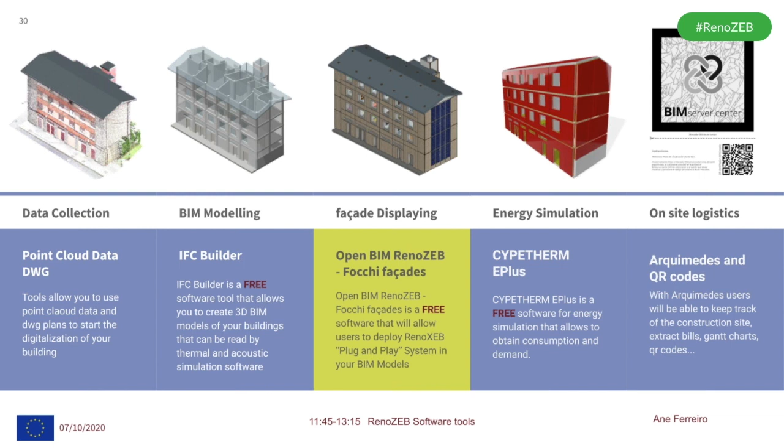Okay, so just to recap, here we have the main software that today I'm going to introduce. The first one is IFC Builder, where we will create the BIM model. Also, as you all know, you can create the BIM models with Revit, with Archicad, with other software that is available. Then we will move to OpenBIM RenoZEB Focchi facades to display the facade.

Then from there, with my building and my facade, we will move to CYPE suite. Here we can calculate pre-renovation and post-renovation simulations and compare them with CYPE improvements. And finally, I will show you all this information in Arquimedes. The budgets, the Gantt charts, this is what we can do in Arquimedes, okay?

Okay, so first of all, IFC Builder is the tool to create BIM models. As you know, what is the big revolution about BIM right now? It's that before we used to have a 3D model created by Rhino, AutoCAD 3D, SketchUp, among others. This 3D model didn't have the data included in it. The big revolution, as I see it in BIM, is to have these 3D models along with the data together.

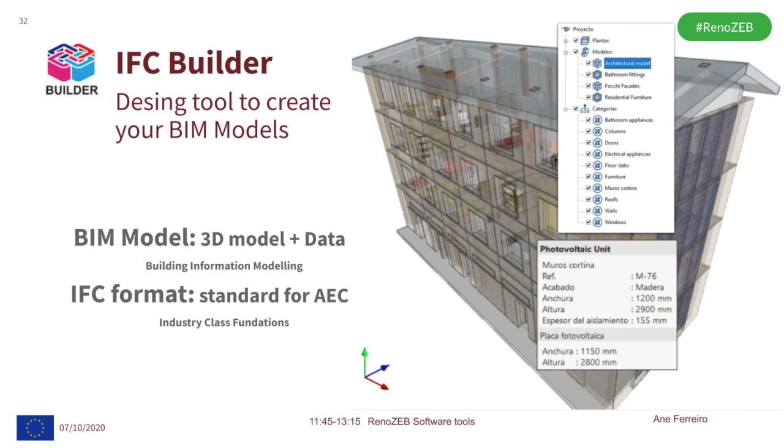Okay. So in IFC Builder, we will build the BIM model. In IFC Builder, we will also be able to include collected information, for example point clouds, DXF, other formats, images, PNGs, etc. The idea is that this software first allows you to bring in this information and then to create this model of walls, windows, slabs. That is BIM modeling right now.

Next slide. Okay. As you see here, through this point cloud data that you have seen before, we have created this BIM model. That will later be useful for CYPETHERM and for energy simulations, which is our objective in this project, to create these energy simulations and to demonstrate that renovation of the buildings could be beneficial.

So as I said before, in this modeler, you will be creating walls, slabs, doors, windows. It's a really simple program that works in 2D, and I will show you later on. First, IFC Builder, then OpenBIM RenoZEB Focchi Facades, which allows you to add a RenoZEB Focchi solution. It allows you to include the predefined units that exist for the renovation facade: opaque unit, window, solar collector, photovoltaic, corner unit.

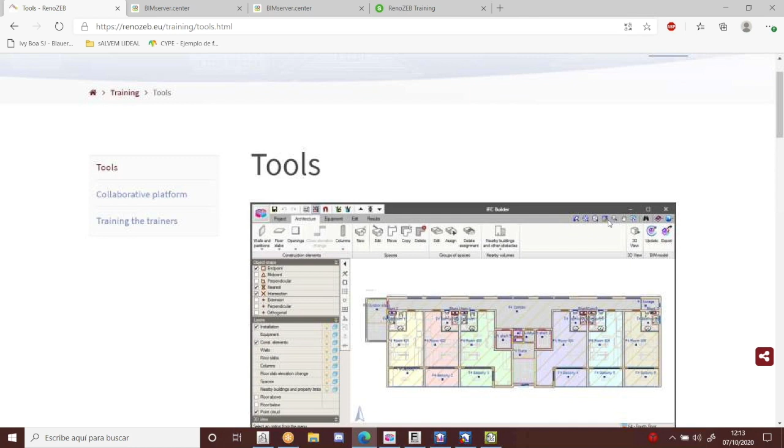Well, first of all, I want to tell you that here we are on the RenoZEB webpage. If you go to training, tools, here you can download all the tools available in this project, like IFC Builder. Also you can access training material on YouTube, on Udemy, for CYPETHERM EPlus, improvements, and so on.

If you click any of those, it will take you to the webpage of our server, called BIM Server Center, and here we have a lot of different software. As you see, this is available for free, so you can download it and try it.

Just to let you know, here in the store of BIM Server Center we have more than 137 programs from different manufacturers and features—structural analysis, bills of quantities, electrical systems, a lot of them, and I think almost 33 are free. So I encourage you to go here and see other programs, because this thermal phase is just one of the phases we can go through.

Here, if you go to thermal analysis, you have all the CYPETHERM solutions: CYPETHERM EPlus, that's this one, the international solution of CYPE. But we also have specific solutions for Spain, France, Italy, Portugal—CYPETHERM adapted to these countries, so you can obtain the energy certificate of each of these countries. That is also interesting.

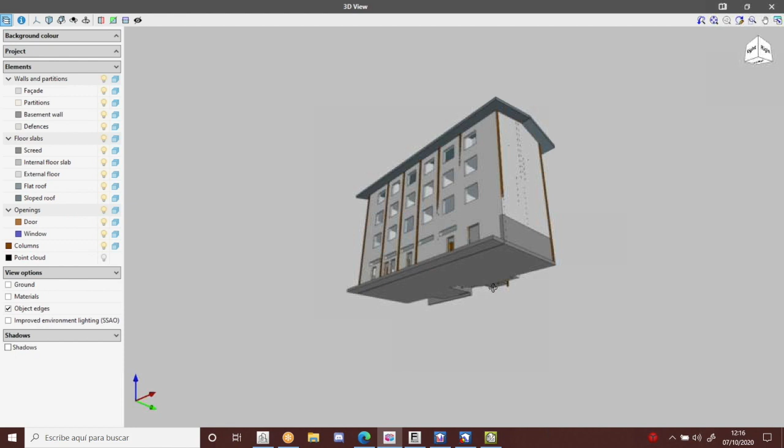This software still works in 2D and then generates a 3D view, a 3D model. It generates a 3D model, but it's working in 2D. I'm going to shut down the point cloud here.

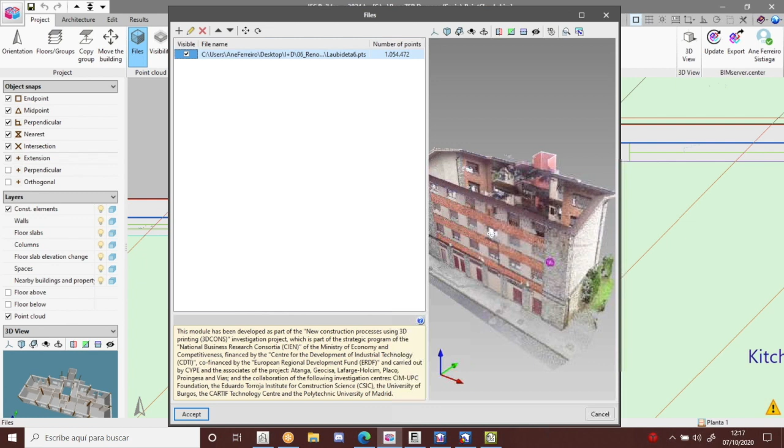So how did I start this project? We started this Durango project using two things. Here you can see we start by creating a point cloud, which was done by demo partners. In this software, we are able to include this point cloud in the model, but we are not able to translate it directly for modeling. We use it as a template in the floor plans to be sure that what we are drawing for the renovation fits somehow the reality.

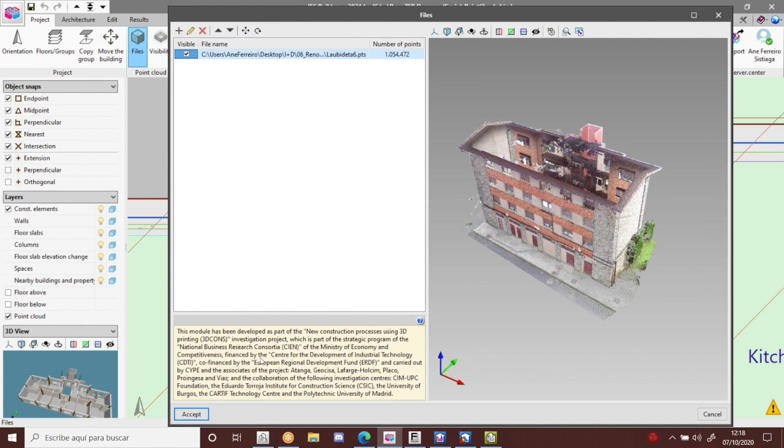This was the first implementation we did in the project, to be able to include huge point clouds. These point clouds are really, really big, so we do a simplification here in the program to be able to run them. Here you can see the point cloud, and here is the representation in 2D of the point cloud.

Then the other thing we used was a 2D plan that was given to us by the owners of the building, Durango. They provided us with a point cloud and with this 2D plan. From those two elements, we tried to create the most fitted project.

All right, I'm going to show the construction elements and I'm going to show again the results.

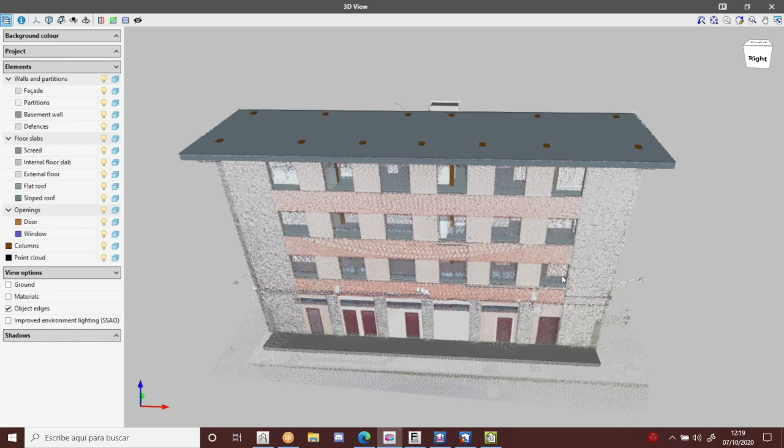What we will be able to do here with the point cloud, just to be realistic about what point clouds can do right now, is use it as a template. You will not have a translator that gives you the 3D model from the point cloud. This technology is actually under construction right now, not only by CYPE but by a lot of other software companies, and it's not perfected yet. So it's still difficult to scan the building and instantly have the BIM model. That should be one of the most interesting aspects of this technology.

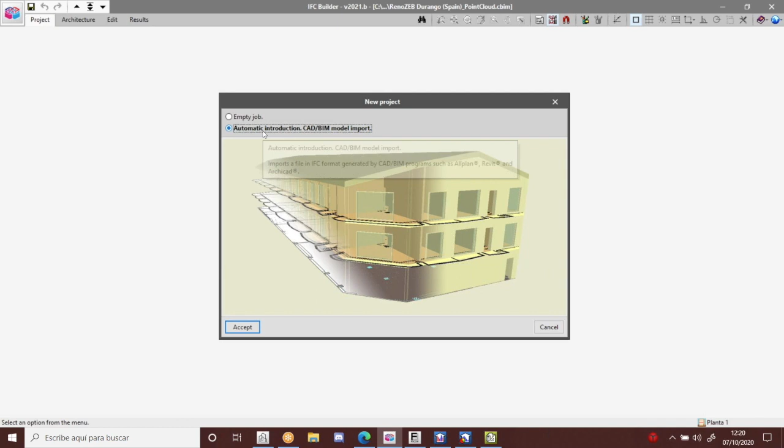I'm going to show you a little how to model. Really quick, I'll put in two or three things because we have quite a lot of software to see. So I'm going to create a new project, as an example, an empty job. I could put in another BIM model or a CAD model or a CAD DXF file, but I'm going to do an empty job now. I can add the floors, so it has two floors and the roof. Accept.

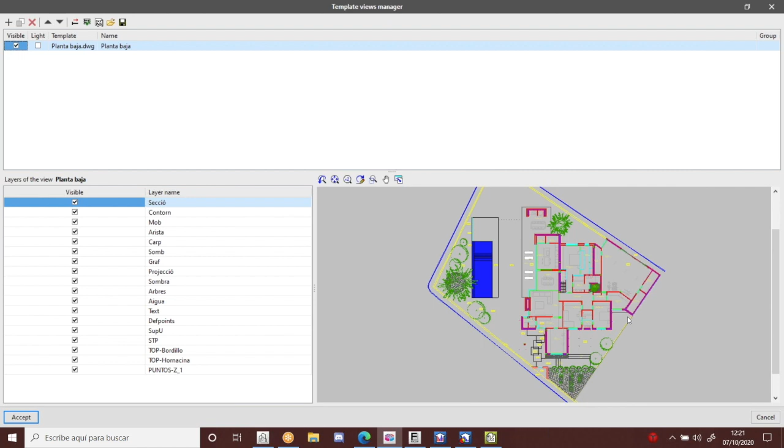Do you want to introduce a drawing? Not now, but here you can also add, for example, let's add one just to show you. This is a CAD template that I have from one example we usually use in the project. Actually, I'm going to add the Durango example that I have here. Durango... no, it's not here. It's, sorry.

So from this sense, we can start with a CAD project in renovation. Sometimes you have these CAD projects, sometimes you don't have any plan, or you have a plan in PDF. You can also add a PDF here if that's the case. So the idea is starting with this, and from here adding the point clouds.

You can start modeling the building. I'm not gonna open the point cloud now because it lasts like 2 or 3 minutes to open. But as I showed you before, you can put those two things together.

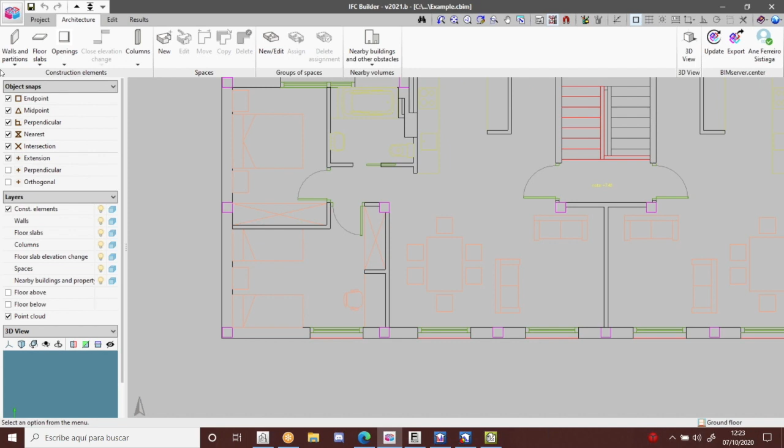I'm gonna create an external wall, for example, external one, okay? From 30, it's not a party wall. And it's really simple to start modeling. You have to be sure that you have snapped the DXF objects, okay?

And now I can in a really simple way start modeling my project from these DWG files. Sorry, I'm gonna do just a quick introduction for you to see the envelope of this floor. So here we can see now that we have modeled the first envelope, and well, we can do so with the rest of the elements.

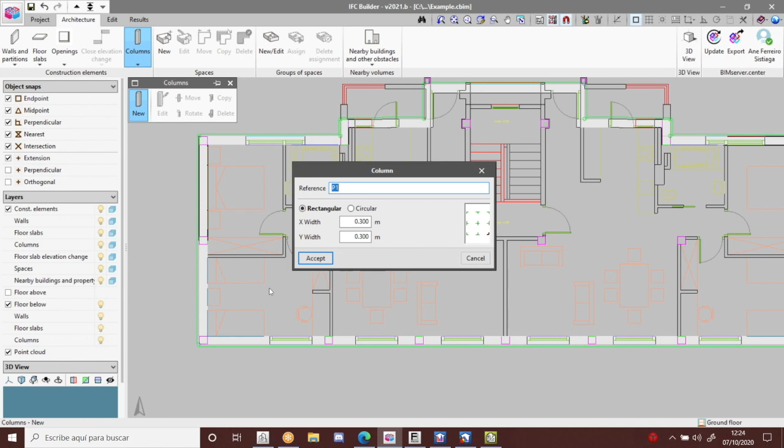We can do columns, for example. I don't know, these ones are little, but okay, we can put the columns. I think this modeler, even though it is quite simple, if you have a really high-tech building, you are not gonna be able to model with it. I think for these buildings that are really regular, typical residential buildings, like from the 80s or the 90s, it's easy to use this modeler, and it simplifies a lot of the work.

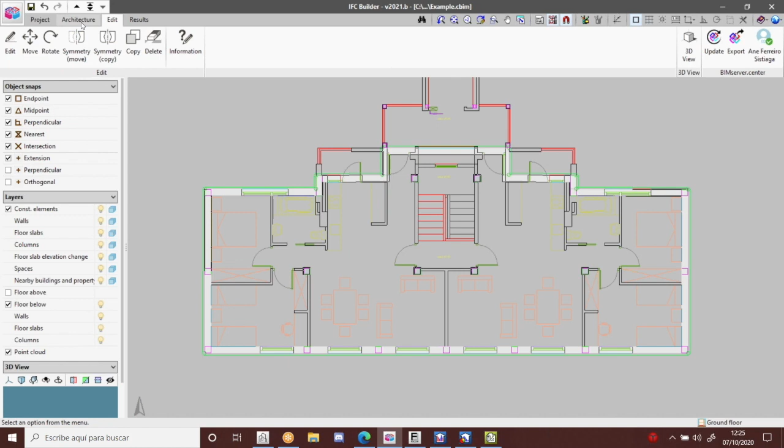Let's see. Okay, we will have now this floor. We can, for example, go to the next floor, sorry. And see, you have the template from the floor below. To continue modeling, you can copy around different buildings, etc.

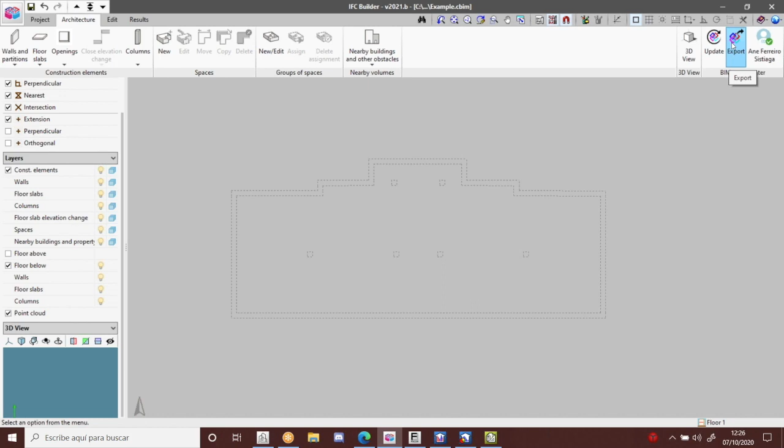I just wanted to tell you also here, when you download an IFC builder, you will have here this advertisement. We have also another 3D modeler that we released a couple months ago. This 3D modeler completely works in 3D, okay? It's more similar to Revit or ArchiCAD or Allplan or other modelers. It's also more complicated, but it's also available for free. So if you want to try it, it will be really interesting for us.

So now we have the floors. We can here visualize the different floors, etc. As you see here, we have drawn all the model. I'm gonna show you also, for example, how to put a window, just for curiosity.

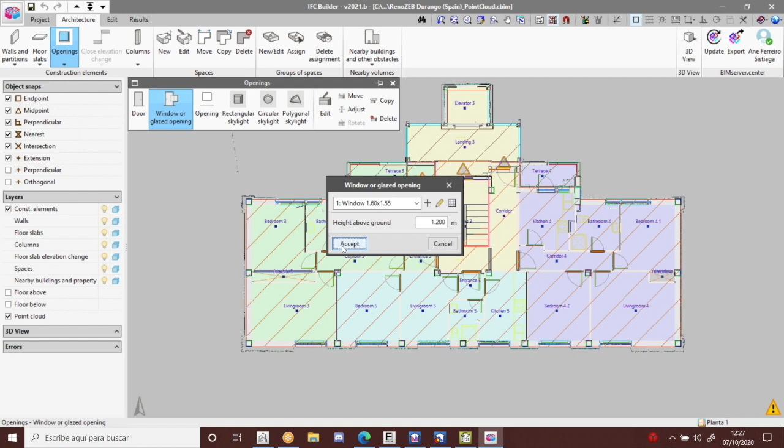Here I have created all the types of window in the building, okay? And actually it's really easy, you click and you click and you will have this window. Here it's warning me that I have introduced the element and it's going outside the wall, okay? It's here, no, and it's going outside the wall. You can see the slab there.

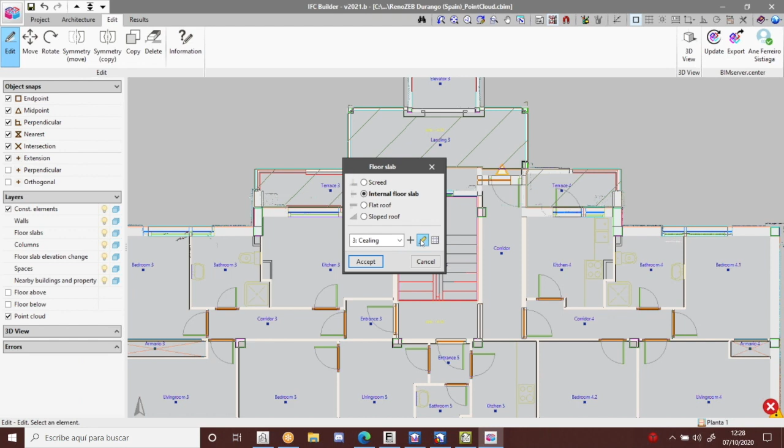So also one thing that this program does is to warn you if the model is not correct for thermal calculations. For example, this floor slab has been introduced as an external floor slab. I should correct this and introduce it as an internal, okay? No, it's as an external. This ceiling, if you see here, okay? So when calculating, the modeler is gonna tell me if the project is okay for energy simulation or not, okay?

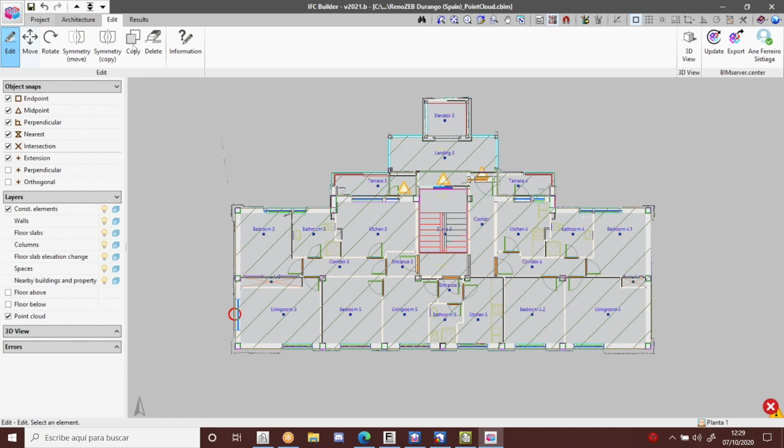I'm gonna delete this window. Oh, now it's giving me this warning, because I have changed this type of floor slabs. Look, I have changed this floor slab to external. So now it's warning me that all these floor slabs are external, but actually are internal. Okay, and see, and now it's correct.

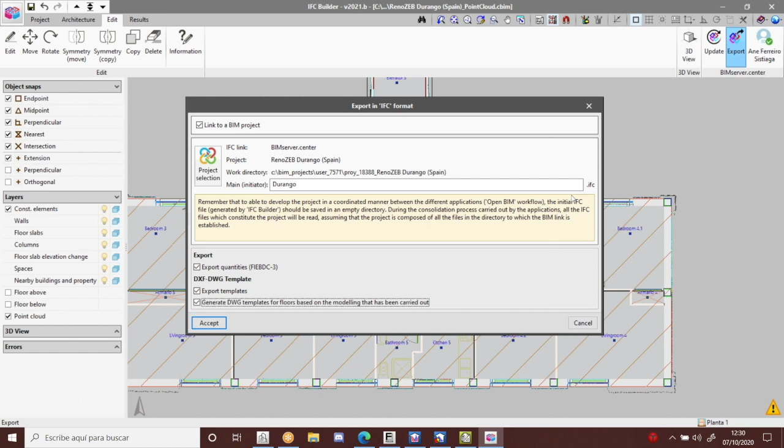Okay, so when finished modeling your building, you will have to export to our server, no? You will have to export to BIMserver.center. As I say, you can export quantities in BC3, and you can export your own templates or generate templates from the ones created here in the project, okay? Accept. I'm not gonna generate templates because I don't need to.

And now the project is stored in BIMserver.center, but it is also stored in this folder, C:\bim_projects. Here you will have all these IFC, glTF, BC3 files, etc. inside this folder. Okay, so now I have the non-renovated building, let's say, and I want to apply the Focchi facade.

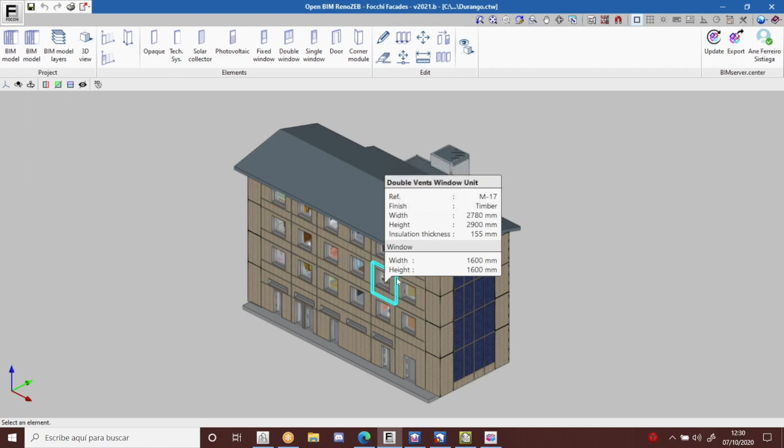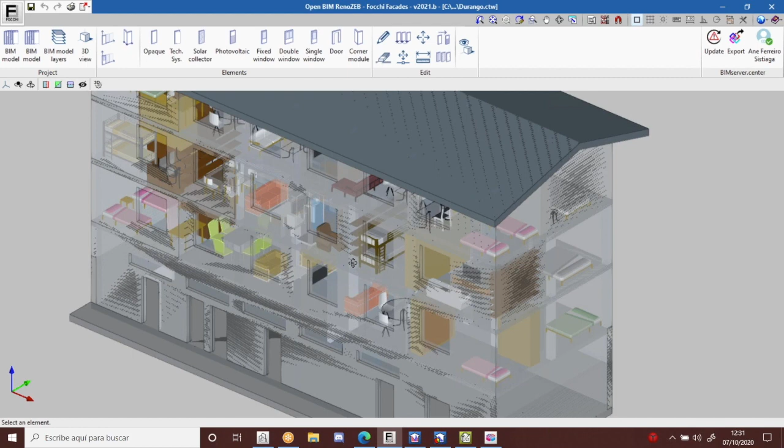What I have done here is I have imported, I'm gonna shut down the Focchi panels, the model of my building. I'm gonna put some transparency on the walls. Not only have I done the 3D modeling, but I have also added furniture with another application that we have in BIMserver, and the bathroom fittings with another application that connects with plumbing calculation software, etc. That's for you to see.

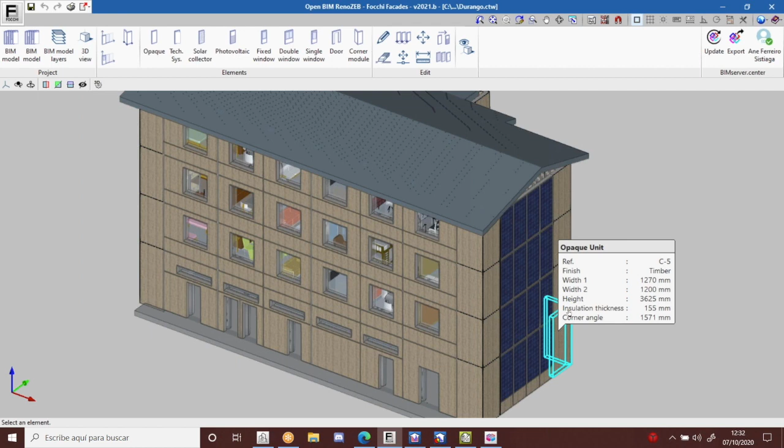So after doing my BIM model of what is actually on the renovation site, what I want to add is the Focchi panels. This first edition is somehow a preview of what you are going to obtain, because in the end the final result is generated by Focchi, the manufacturer. They help you do the project, fit the panels, and see the best way to transport and install these panels. This is a preview to do thermal calculations, let's say.

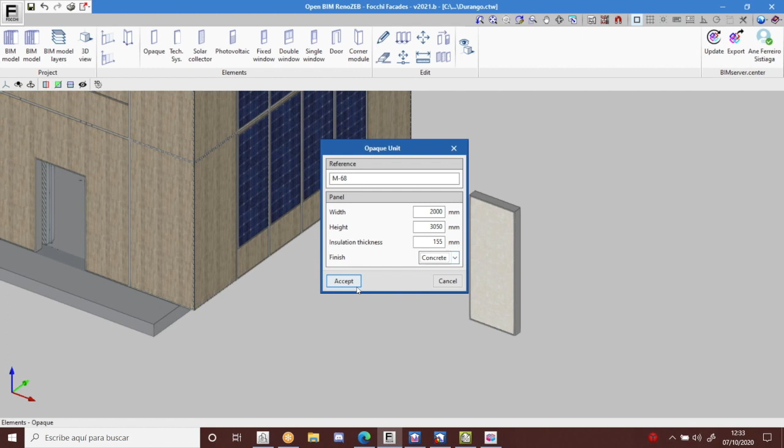So this is a really simple application. You have all the units that Focchi has available for this plug and play facade. For the opaque unit, you can set different widths, heights, insulation thicknesses, and type of finish material. First we have solid panels. Then we have panels that are physically the same but have technical systems inside, to indicate to Focchi that these panels will contain technical systems.

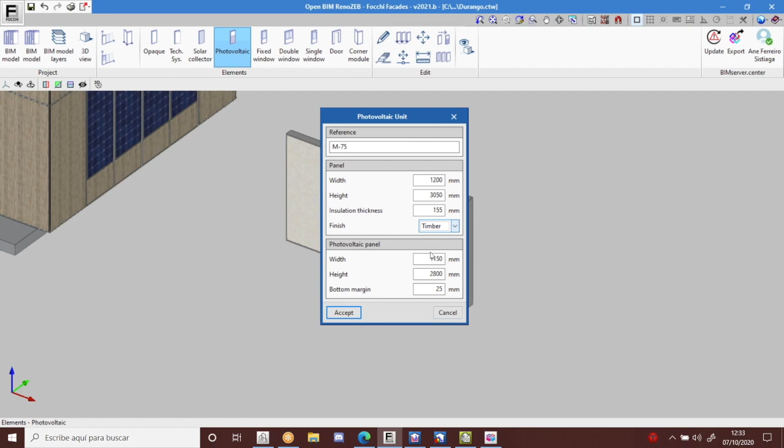We also have panels for solar collectors, and photovoltaic panels. Later on, I'm sure Alessandro will explain really well all the types of panels and possibilities available for this plug and play facade. But just to show you a little of what is available and what you will be able to install in this renovation.

Then we have windows, fixed, double, doors, and then corner modules, because, as you know, for renovation the corners are really important and we need to fit this information. Okay, so I'm gonna delete this, and show you how to use the software a little to do this pre-design phase, a really quick phase.

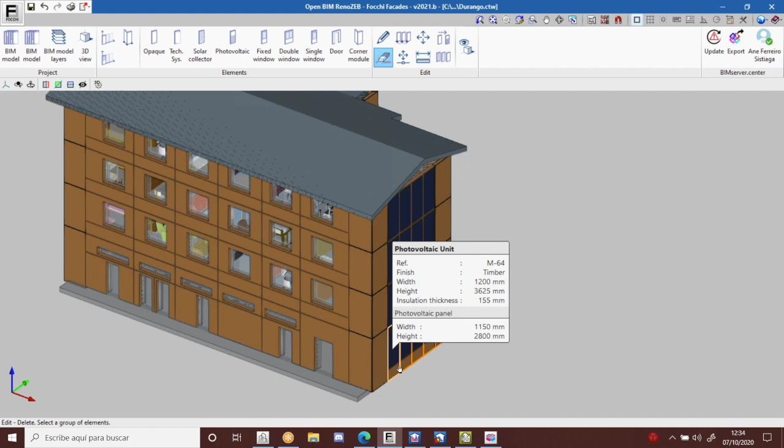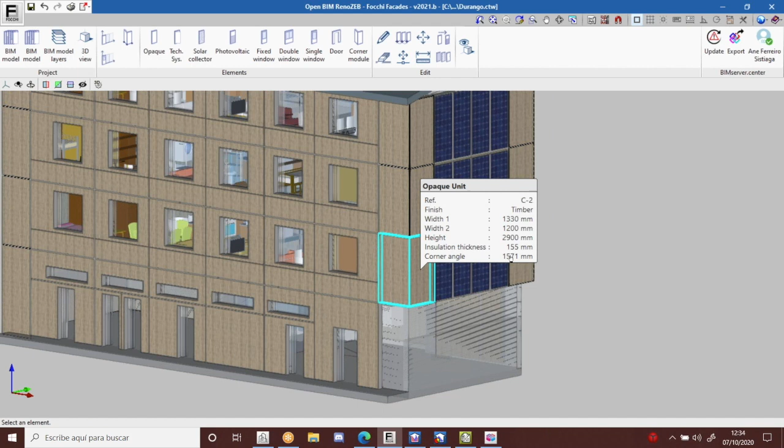I'm gonna delete some of these panels. If you use Alt 2, 3, 4, you can go to the different views, and you can rotate. For example, I think this facade could be optimal for photovoltaic panels, and I'm gonna install them here. You can install them individually, as you saw before, but we don't want to do that. We need the software to help us, so we are going to use these three buttons to install the panels in the module.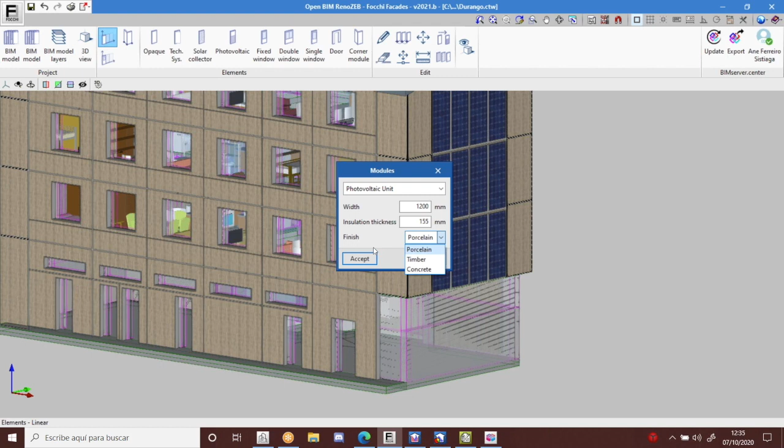We choose which type of unit we want. I'm using a photovoltaic unit, the width, the insulation thickness, the finishing, porcelain. And then I just select the height of the panels. This will build them. Look, this one has not been built because it was smaller than the photovoltaic panel, so it doesn't fit. But it's okay. So this is the way we can install.

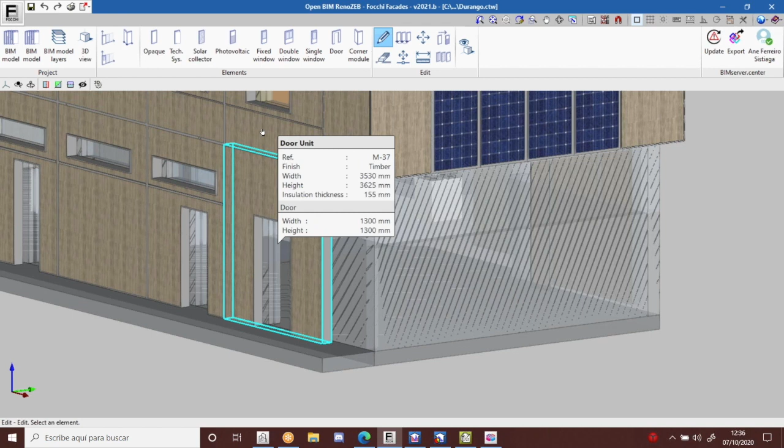I'm gonna do it again for you to see. I go here and install a photovoltaic panel, click here and here, and then the height of the panel. There, accept. I clicked a little bit under, but it's okay. So this is the way I can install this panel.

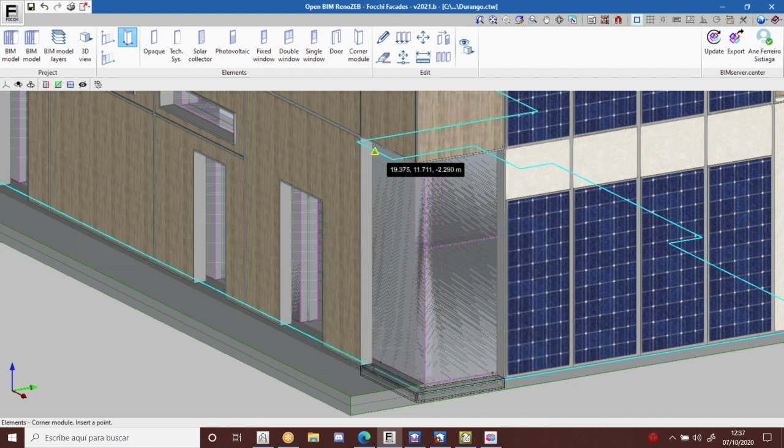For example, here I actually want to use a corner panel. Same process, an opaque unit, I click here, here, here, and the height, accept, and you have installed this corner panel. The same if the corner faces backwards. I'm gonna delete that one.

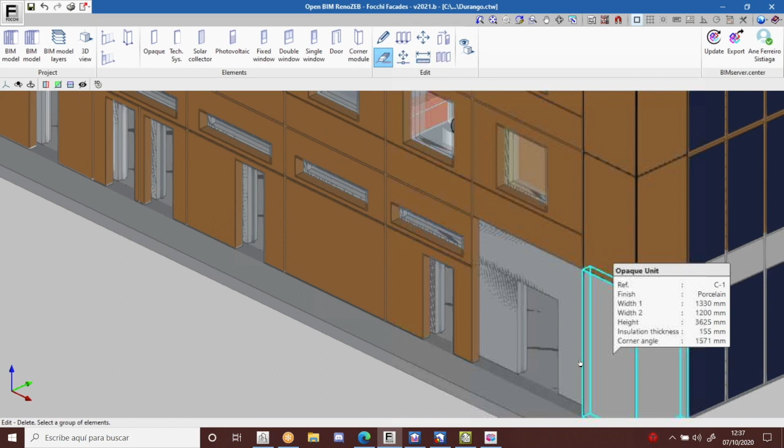Also for windows and doors, you click this one. For example, I want a door unit, accept. First I tell the software where the door is, and then where I want to put the panel, and it actually brings you the panel here.

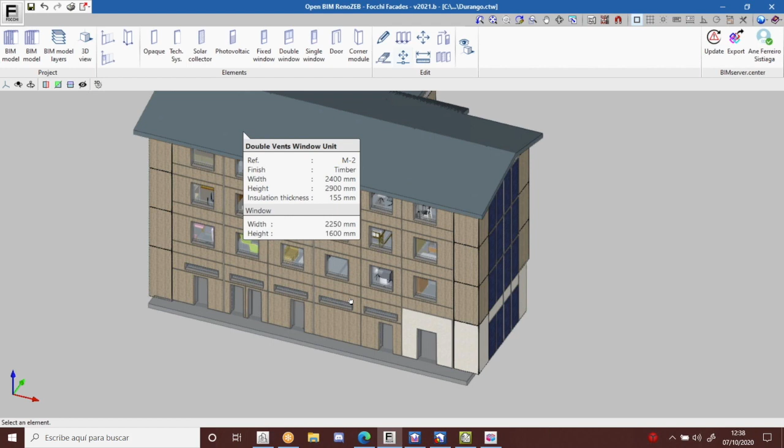Okay, this is a really simple software, and the idea is to use it quickly to see how a renovation with this system can fit in your building, and after that to calculate in CYPETHERM, with the information exported, the simulation of this building. I will show you later on these panels in CYPETHERM, and you will see CYPETHERM is quite an advanced program.

It has EnergyPlus. It's not as simple as this program, okay? But this one I think is really interesting because it gives you this first glance. Also, you could have here the PDF that is going to be exported with all the description of the panels, the different sizes and types, etc. Okay.

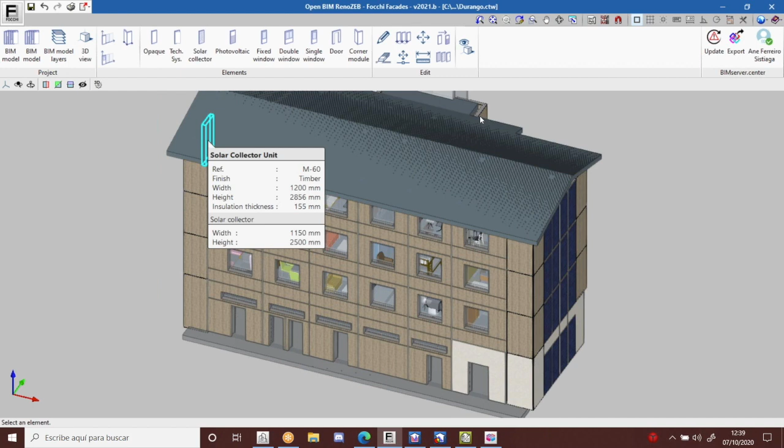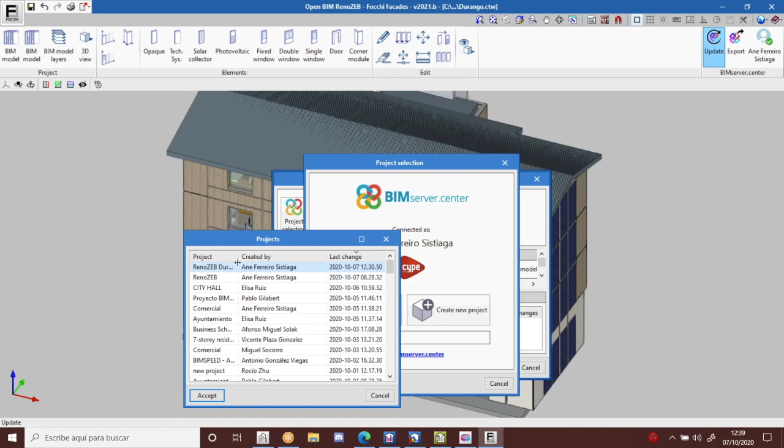Let's go now. When I'm finished, the idea is, okay, now I have finished the plug and play distribution, let's say, and I'm going to export again. This is the example, so I'm not connected here to BIMserver. I will have to connect in this button, project selection, and select my project here. So I could here select RenoZEB Durango. I'm not gonna do it because I have changed things here and I want to use the original file, okay?

But then you will export the project again and it will be able to arrive to CYPETHERM, okay? So the idea is that first we are in IFC Builder. Sorry that I am being so insistent, but I think it's important that you know the workflow. First, I have built my model in IFC Builder. Then I have created this Focchi facade system with Open BIM RenoZEB Focchi facades.

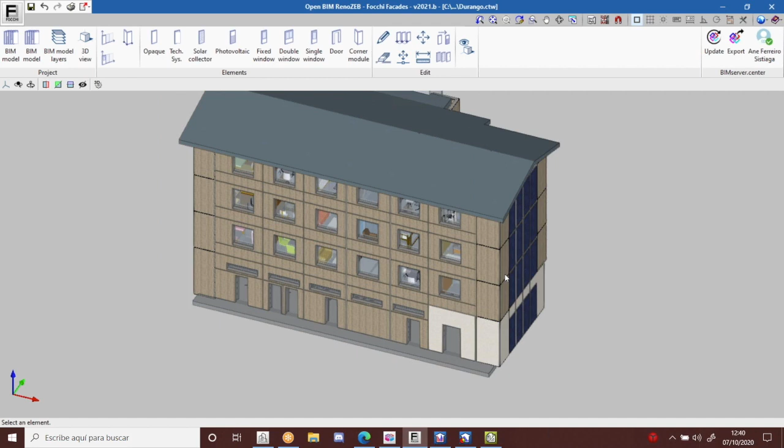These two softwares are completely free. So I think it's one good start option for those who have not yet entered BIM modeling. So you can enter for free, try it and see what's going on, and it gives you some important advances in your work. And then we will export again, and we will load this same model in the CYPETHERM software, okay.

This CYPETHERM software is quite a more complex software. As you know, thermal calculations are not as simple as displaying one facade. So for that, I'm going to remind you that we already have some courses on CYPETHERM on YouTube. If you want to learn how to use the software, these courses work quite well. They are 1.5 hour courses,

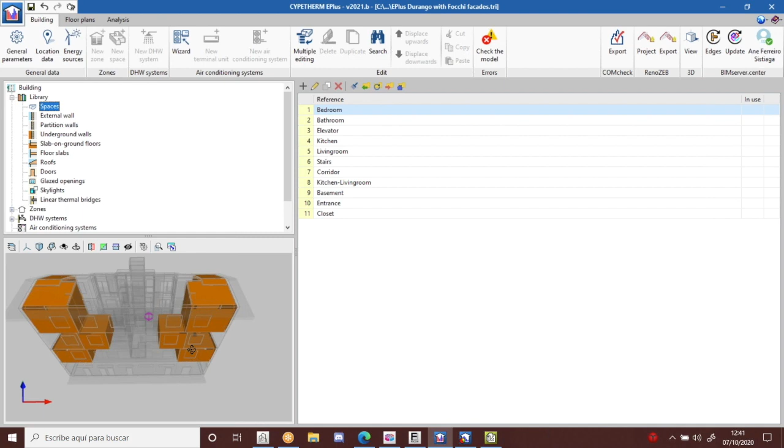and I'm not gonna be able here to explain detail by detail all the features of this program, but basically you have your BIM model, you have all the information that has traveled through the IFC format here, the external walls, the partition walls, the underground walls, the roofs, the doors, okay? As you see here also in the 3D model, you can see the openings displayed. You can go through the different openings of the building, okay?

Also, the thermal zones of the building. Here you can see we have the different apartments. Also, all this is information that has been read from IFC Builder. Here I have not told one important thing. Sorry that I go backwards and forwards, but one important thing, not only in IFC Builder, but for any person that wants to do a simulation, are the spaces or rooms, okay?

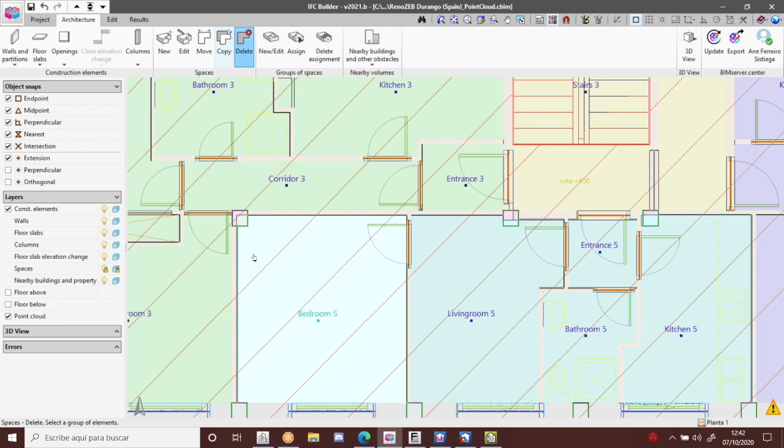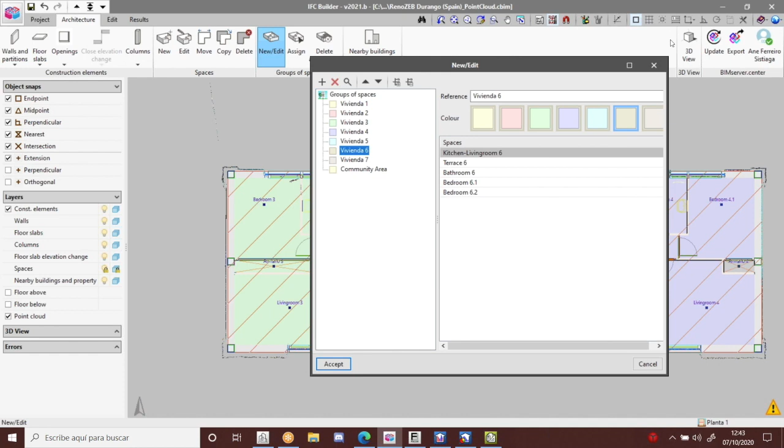This information that you are seeing in CYPE actually has been created here. So you have here the different spaces or viviendas, the different homes, sorry, with each of the spaces that is dedicated to one of the homes. Here is where you can manage and say, okay, this is a bathroom, or this is a, I'm gonna delete this space, but basically, if you want to add, I have here created the different types of spaces, and you click in the space, that one, and it automatically detects the space, and it's gonna give you that measurement, okay?

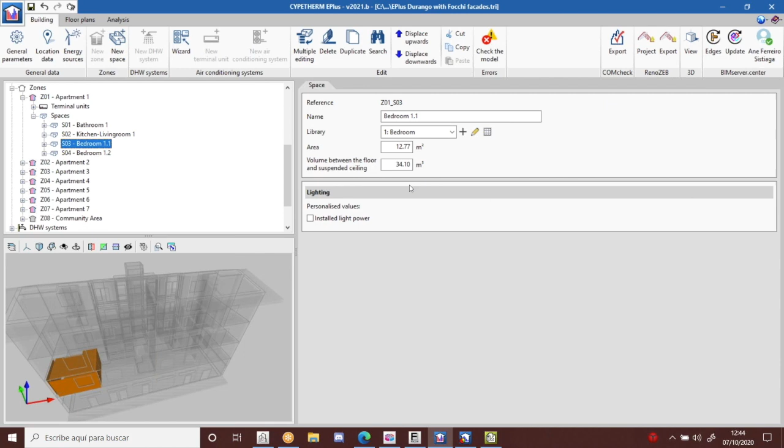So all this information that you have created here is then represented here, okay? For example, it's able not only to read the spaces, but to read the apartments. You have here inside apartment 1 the parts, you can set the area, the volume, etc. Okay, creating these thermal zones, hot water systems also. You can also add air conditioning systems here.

Okay, it's a quite extended program that goes through all the different parts of energy efficiency, from the description of the elements to hot water, air conditioning, and shadows. And from all that information, it deploys a simulation for this building. So here I have the solution with Focchi facades. I'm gonna save. Wait, and I'm gonna show you a little bit what I have here.

When I open the program, I don't have this image on the right, okay? Just in the case that I'm importing from Focchi facade, I will have this first panel that is composed of the panel of Focchi and the panel of insulation, but then you will have to add here the actual facade of your building, because we are not able to know what is actually installed in your building. So for example, with the Focchi facade panels, what you will have will be only these 2 layers first, and then you will have to add all the current layers to the project.

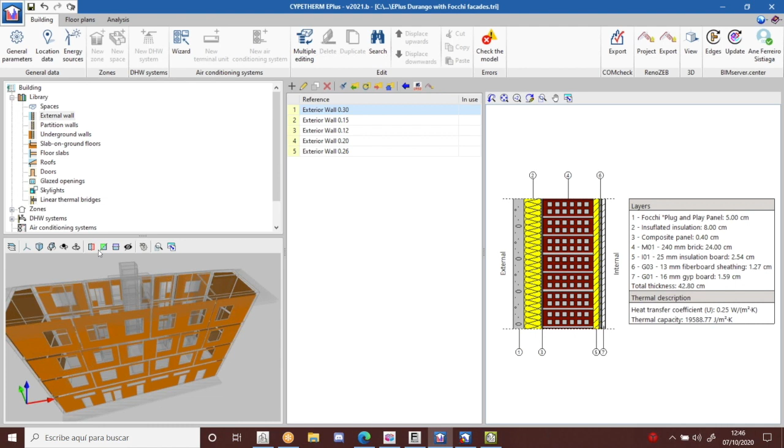Okay. For those exterior walls, I have applied the Focchi facade system all around the building. Actually, in the real demo, we are not applying it to the complete facade. I think we are applying it to the front and both sides, not the back. And what you have here is a layer description of these walls: Focchi plug and play panel, the thickness, the conductivity, the thermal resistance, insulation, composite panel. This is the layer description that you can see here, okay? But here you have all the information that can be changed, updated, etc.

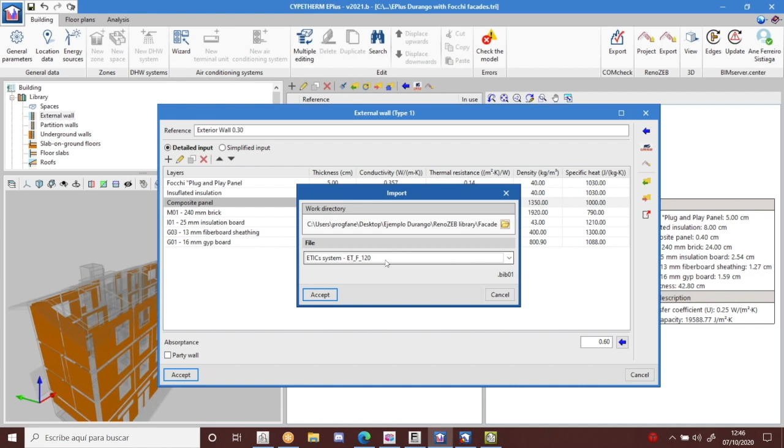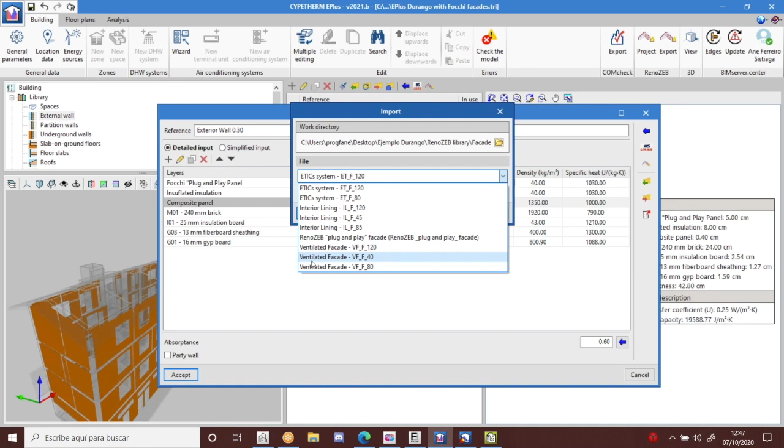What is interesting from this part is that you will have accessible, for example, part of the systems that we provide with the e-catalog. You will have accessible some systems to use for your renovation: ETICs system, interior lining, RenoZEB plug and play facade, ventilated facade. Okay. Here you can load it with the library.

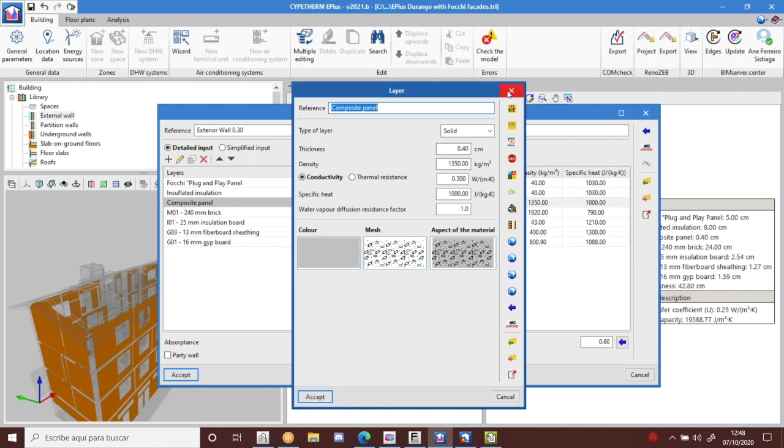And also, just to inform you, we have quite a few other libraries. If you click here, you will be able to display a lot of libraries. Some of them are from Spain, some of them are international. For example, these are cavity. Some of them are from France. Representative materials, for example, finishings. And here you have quite a big library, not only the one that RenoZEB provides, but others that projects we have participated in have provided to the program. So here you have something to start your project.

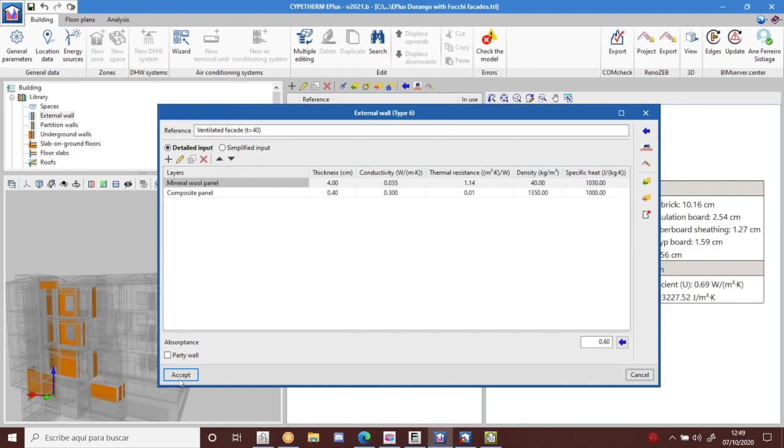As you see here, you have all the information. You can change the thickness of the composite panel, to see which will perform better, okay, and accept. So in this way, you will be filling in all this information in this exterior wall, for example, with this, which was the original wall. I can add some insulation. For example, I'm going to go here to the ventilated facade, and I could add this system, okay?

Sorry, not here. You have to go inside the project and add this here, okay? Not outside. Here you create a new type of wall. You have to go inside an existing wall. Okay, so the same for partition walls, the same for roofs.

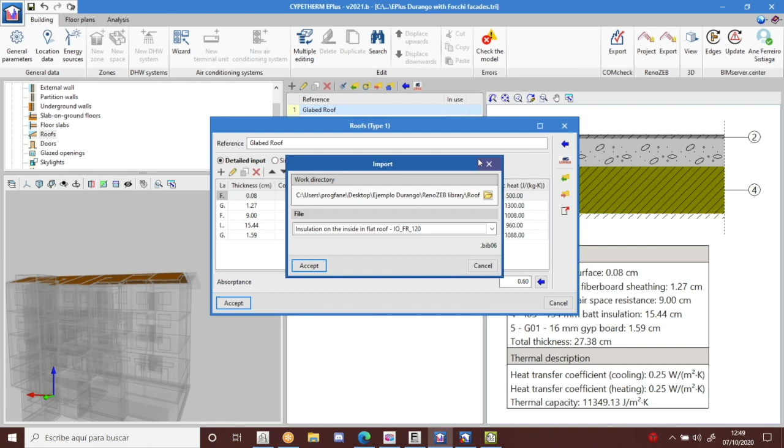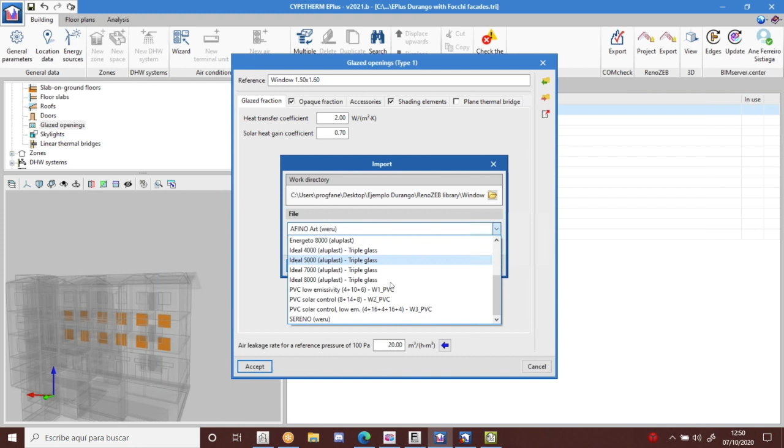For example, we have also here some solutions for flat and sloped roofs, and the same for more libraries. You have here also all these libraries, not only the RenoZEB one, but more libraries. Glazing openings, where you can put the opaque fraction, shading elements, all this information that is available. Also, you have here a small catalog coming from RenoZEB that can help you improve this renovation, for example. So information will be loaded automatically, and you can accept the panel.

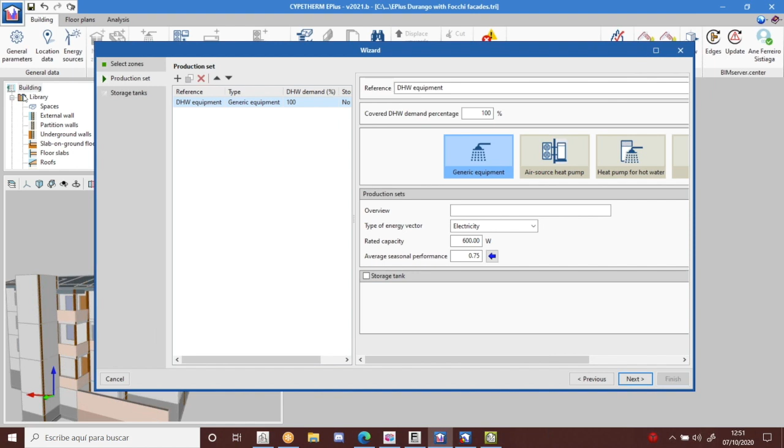And also, as I say, you can add hot water systems. You can select the apartments. And here you will have assistance adding all these water systems, so it can be easier to add all this information that is needed for the simulation. Okay, air-source heat pump for water, the storage tanks also. And the same for air conditioning, as I showed you.

For example, let's go to expansion. You have generic air conditioning systems, but in this program you are also going to find systems that are actually from providers, so manufacturers, Toshiba, Daikin, Fujitsu, and you will be able to install them and know how these systems perform with actual manufacturer elements.

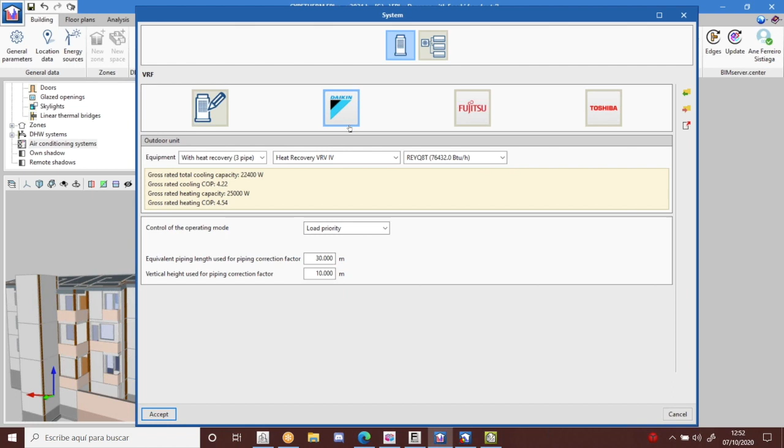I think one important thing in BIM is that we are creating this 3D model, and this 3D model has to be as real as possible, because a lot of people also talk about digital twins. And at CYPE, we think the most realistic thing we can do is to add catalog products to our software. Not only here, but in the store that I showed you before, you can have catalogs from a lot of manufacturers. We think this is the correct way to do it because they provide this information directly, it is connected to our database, and you will have the finest performance this simulation engine can deliver when you actually have the data, the curves from the manufacturers.

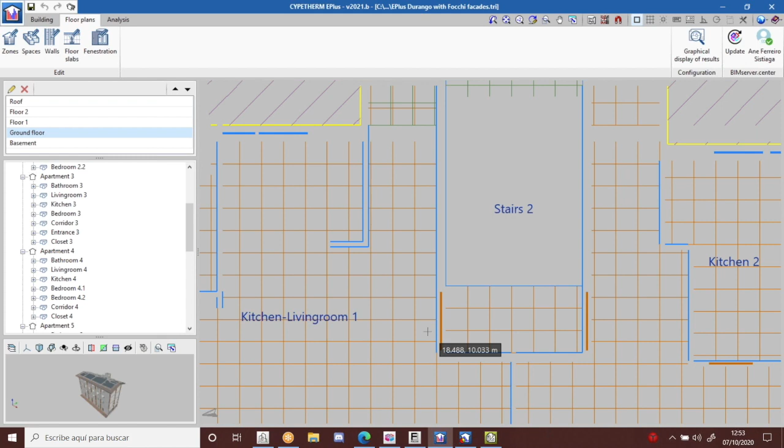Okay, so also you can add air conditioning. Okay, and floor plans. Well, here you can see the floor plans of the building. Here, as you see, those are the thermal bridges, okay, that the program is detecting.

But what I'm going to go now is to the part of analysis. Let's wait a little because this has to think. Okay. So now I will have to analyze my project. Okay. It's really simple. You click here to analyze. You can simulate demand and consumption. You can export thermal bridges or not.

You can put set point temperatures for your building, okay, for heating and cooling. And you can also, if you want, indicate a simulation period. If not, it's gonna be simulated one year around.

Sorry, one important thing before simulation, sorry that I go backwards, one important thing on this program is also the location data, okay? This location data is an EPW file. It's an EnergyPlus weather data file, and EnergyPlus is an international engine. Okay, so see if you put EnergyPlus weather data,

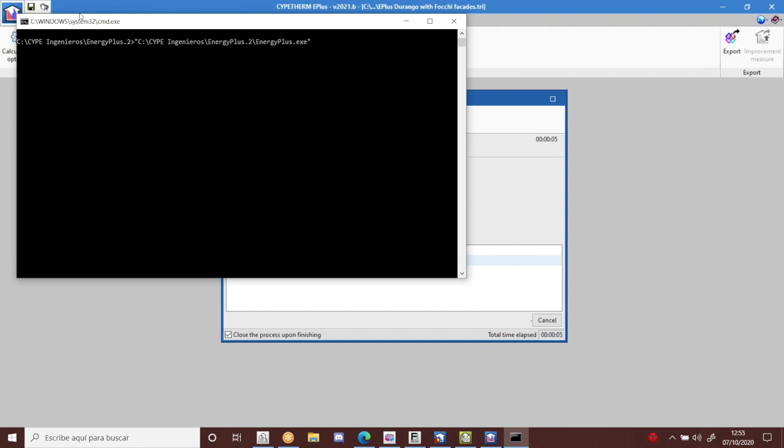So what this will do is process all the data, and as you see here, it is sending all the data to the EnergyPlus simulation engine. This software is free because this engine is an open source engine. So we are using an open source engine and giving it an interface. So here it is going to be calculated.

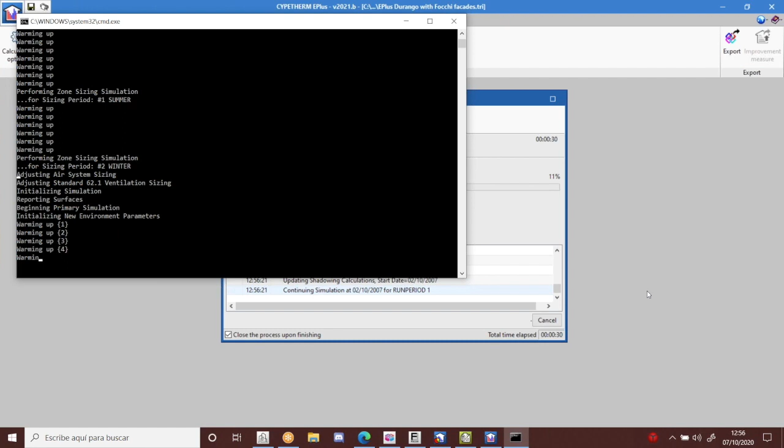I'm gonna wait a little bit because I think this one should not take that much time. Okay. As you see, it is running periods. It's running period 1, so. Okay, sorry. If it takes too long, I will open one that is already analyzed.

Larissa, until what time do I have? We have until 1:15, but it's good to have some time for questions. We have quite good questions in the chat box.

Okay, so I'm gonna move to the next software, and I'm sorry because it's a lot of things to explain, and I have quite a short time for each one. So after this simulation that I'm running here to show you later, you can export this simulation to a program that will be able to compare both solutions.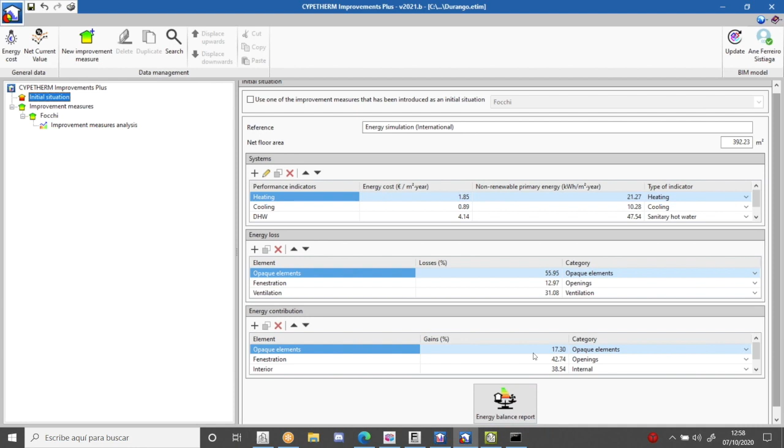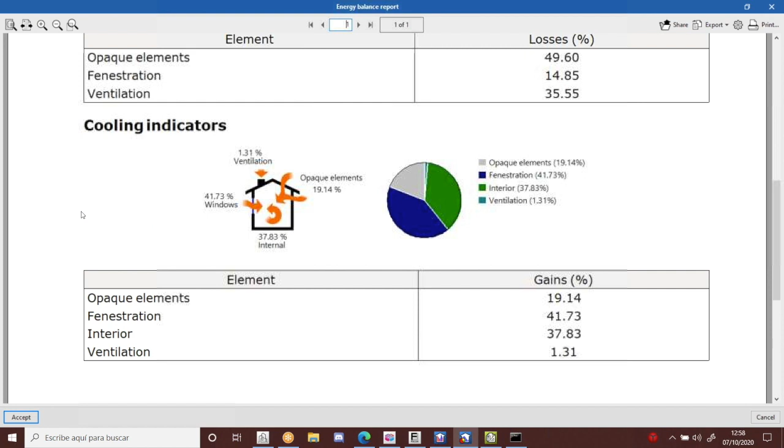And then we have also the improvement measures. So here you can see also the same information. If you click here, it's gonna give you a PDF of the energy balance, heating indicators, cooling indicators, etc. Okay, that is interesting to compare. For example, this was the renovation. This was the energy balance of the renovation.

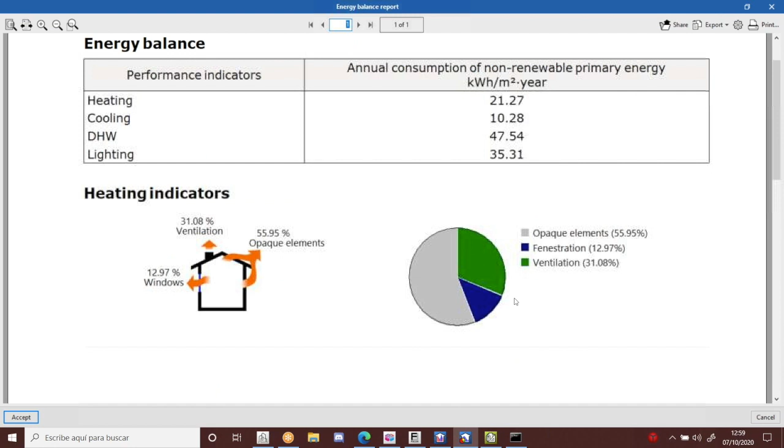After renovation, we have here 49% of energy losses. Let's see the other one. And the initial one, we had almost 56% of energy losses. Okay. In this sense, I want to show you the report from EnergyPlus. It's still calculating because I want to show you a full report. This, let's say, is a simplified report.

Here you can add budgets, associated expenses with the renovation, etc., to have this complete overview. Okay, but this is more like an application. Okay, and these are the results for the simulation of the building. You will have heating energy at minimum temperatures, cooling energy, heating demand, for example. I don't want to go too deep, but here you have quite a lot of information.

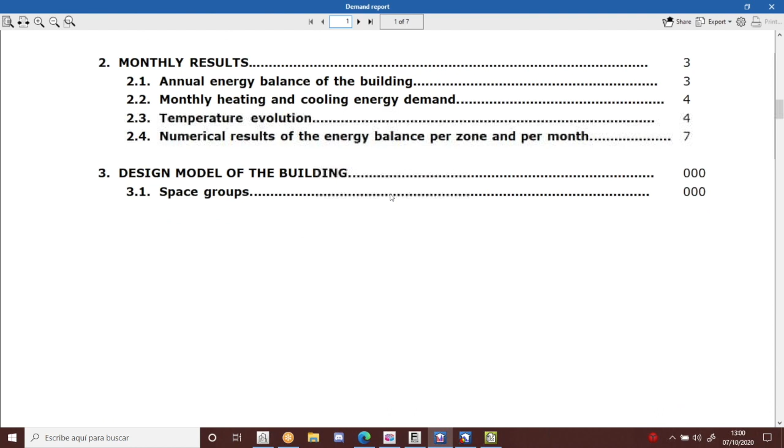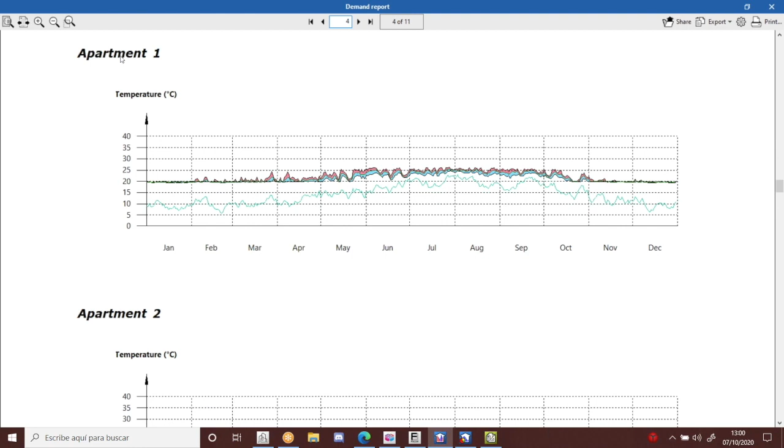In the case that you are using a software from a specific country, you will obtain also the certification. Okay, and here you will obtain also reports with all the zones described, all the heating and cooling consumption, different graphs. Sorry that I cannot go too deep right now, but you will obtain graphs by apartment, etc. Okay.

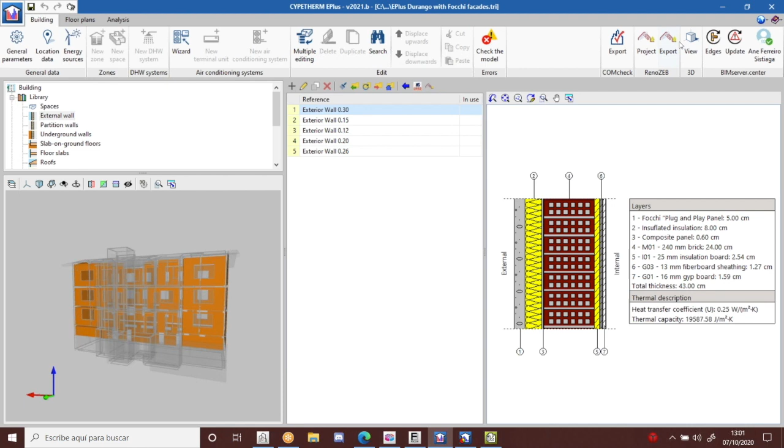Well, in Improvements, we can compare them and obtain these small reports also. But also what you can do is to compare them inside the RenoZEB platform, okay? So if you see here, we have these two buttons, RenoZEB project and export. Here we can do two things, okay? Maybe we are using the CYPE system, so we are exporting and importing with BIMserver, but we can also here import models from the RenoZEB platform.

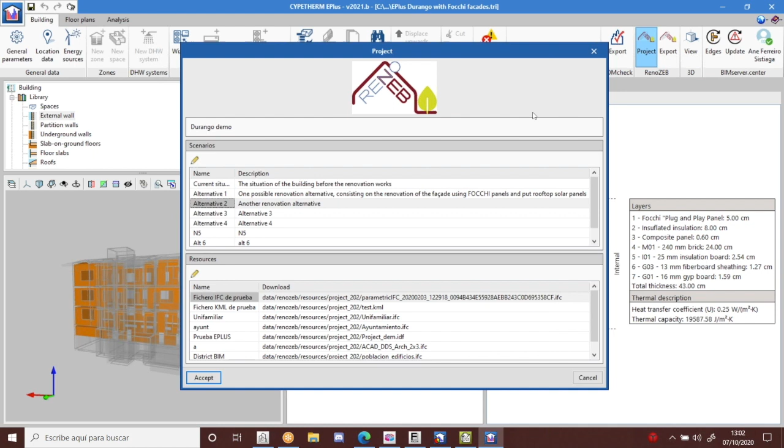So here, what I am doing is connecting to the RenoZEB platform. Here, I'm accessing the different projects, as we saw before, Durango, Boru, Cubic. So if I enter one project, let's go to this one, that is the one that has information. Here I can see the different alternatives and the resources attached to these alternatives, and I can load an IFC from the platform, do the simulation, and after that I can also export this information to the platform. Okay, I have to log in here also.

Okay, I think I put the password correctly. Well, whatever.

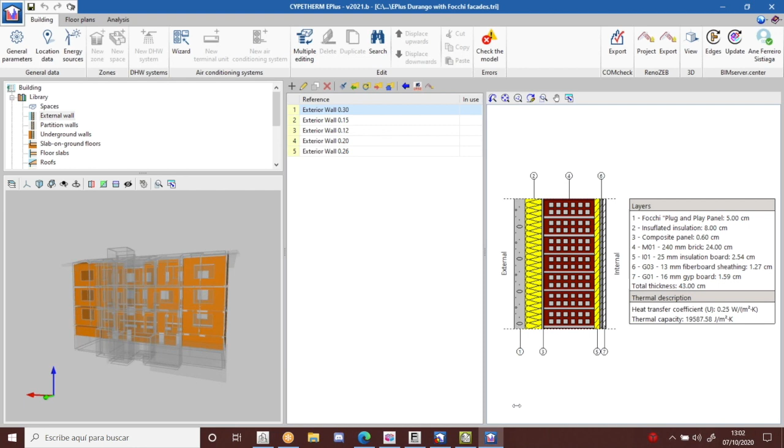This is the idea. This software, CYPETHERM, is also connected with the platform, so you can see results pre and post renovation with the KPIs of the platform, which are quite more developed than the ones in CYPETHERM Improvements. In any case, you always have CYPETHERM Improvements to do these comparisons. So just to finish, we have gone through IFC Builder, Focchi Facades, the CYPETHERM suite that has E+ and Improvements. And to finalize, we are going to finish this project with Arquimedes.

Arquimedes is not a free software in comparison with the other ones. This is a budget and site control software. It's quite developed. This software has more than 20 years, so it is extensively used by our clients. And what we can do here, and just being very brief because I know you probably have a lot of questions, if you are used to budget software...

What we have done here is, through this BC3, we have received all the information from the measurements of the opaque retrofitting facades, okay? And here we have an estimated price per square meter for the facade, for the different types. And then we also have the architectural model. All of this information has come from the architectural model that we created in IFC Builder.

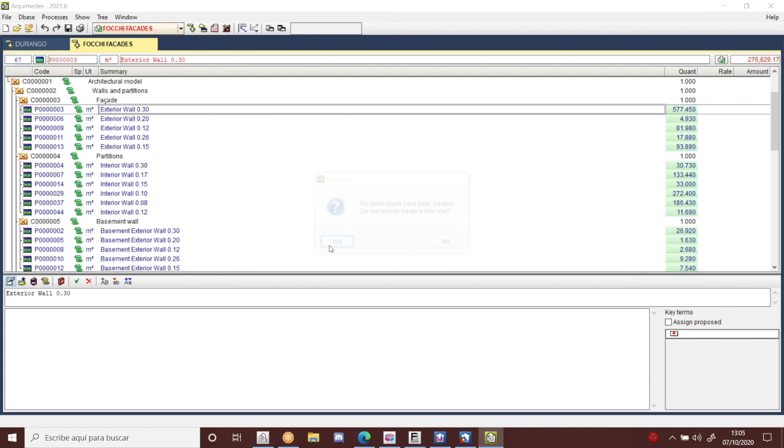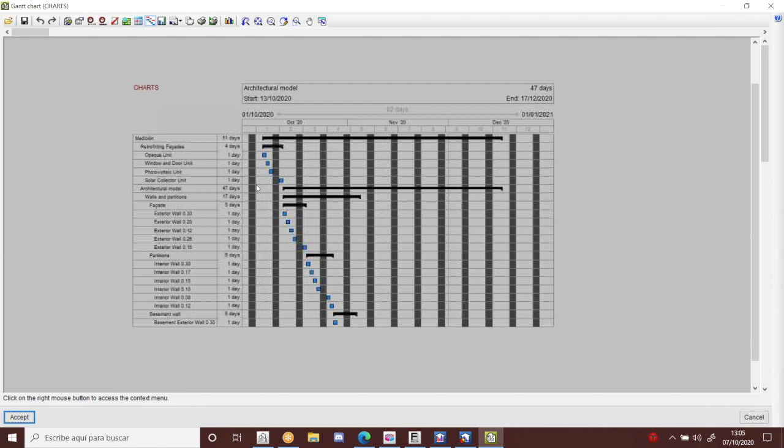Also, I want to show you another important thing that we made, which was the possibility of creating Gantt charts with the construction materials of the project. This is an automatic Gantt chart that is generated, but as you see, you have all the elements here, and you can edit, add, extend, move, do different things and export it to the platform. Okay.

Finally, just to finish, I wanted to say that we have added this QR code implementation that is not only available here, but also from our BIM Server Center mobile application. And what you will be able to do with this QR code is not only to locate your building, but also to access all the files available for your building: plans, PDFs, 3D models, etc. Also, we have implemented other things to share it through Facebook or to put it inside your web page embedded with the 3D view.

And well, I think Larissa, it's time for the questions, because if not, I'm not going to answer anything. Okay, I think I have talked a lot. Let's see if we can go through them now.

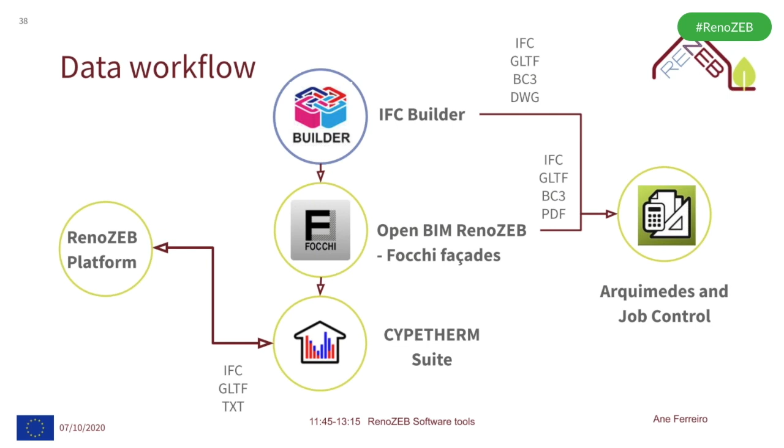Point clouds are actually photos, laser photos of your building. What you need is a laser scan. Right now there's a lot of companies doing this job. Even though it's quite new, it's not such an expensive quantity of money that you have to spend. I'm not sure, but I remember this scanning was around 3,000 or 4,000, 3,000 euros. It's not cheap yet, but I think it's quite interesting scanning.

And what it does - do you have a laser scan? The laser scan is located in different parts of the building. It throws lasers to the building and gives points when the laser goes back. Then you can display this information on a computer.

The point clouds, I think, is a really interesting technology. I think yet it's not developed to its full potential, because the interesting thing would be that from these point clouds you will be able to immediately obtain the 3D model. There are some plugins trying to do that, but at least for me this technology is still in process - not the laser scanning, but the transformation of the laser scanning into BIM models.